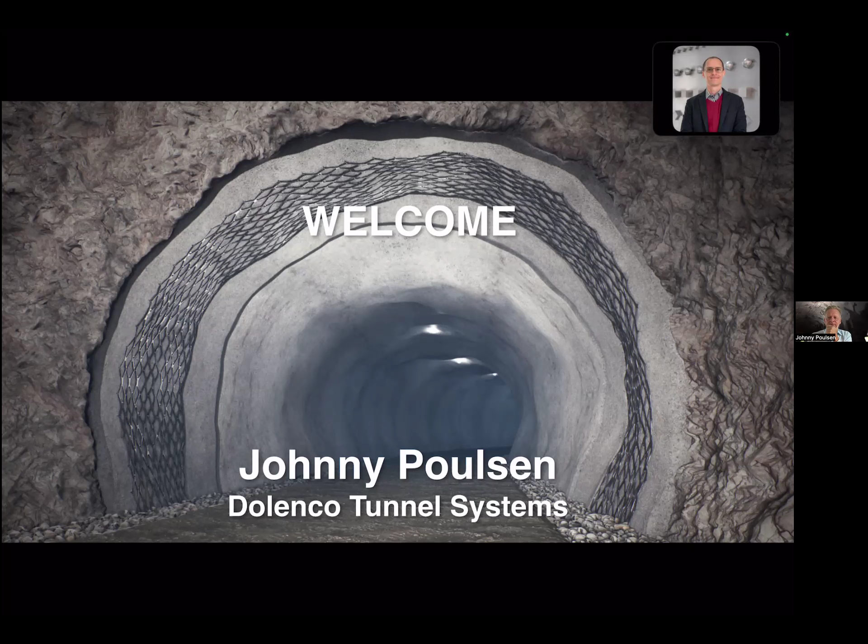When we start up and talk about tunneling, we have two things we typically think about: the soil and the water. When we do the excavations, we could talk about the soil dynamics. What happens when we dig out an entire tunnel from a mountain? The soil dynamics change, and they can change dramatically, as we can see in the picture here. And of course, our work is complicated because these changes are very variable. We don't always know. We try to make investigations, but still we get surprises during the phases we go through.

So now what we have are the pressures from this open excavation we have made. We have pressure from water and soil. And typically for the water, we see that pressure being released into the tunnel. This is how we see all the water running in, of course.

So we conclude that we do the construction the best we learn, and we do this to make it useful. In the beginning, to make it safe, but useful, so we can utilize it for whatever the aim of the tunnel is. After we have constructed the whole linings and so on, what we have decided for the individual project, we will get a new dynamic and a new balance in the structure. This is the basis for the soil dynamics - we see that it's settling and finding a new balance there.

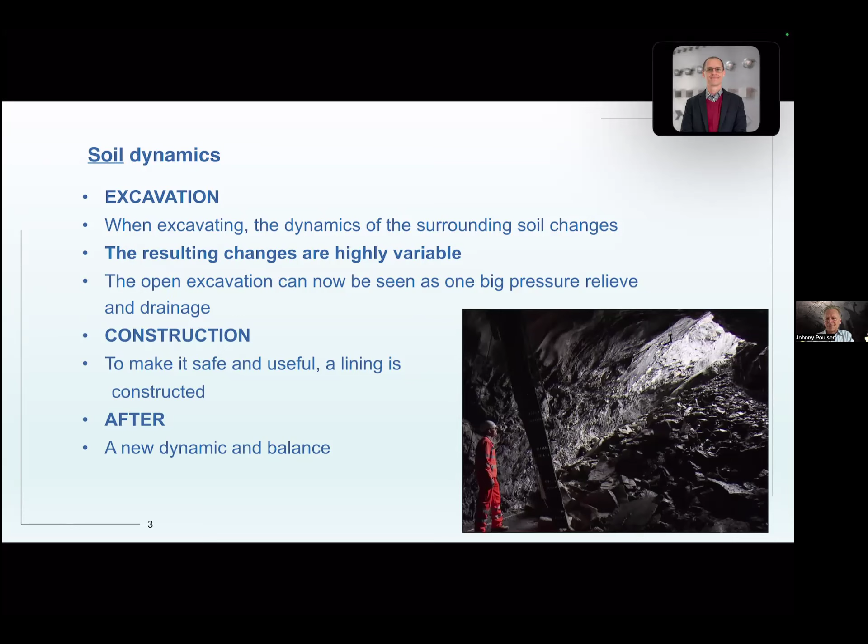As for the water, we have the same cycles where we excavate, the water starts flowing freely wherever it is possible. We can see this on the photo here. You all know about these situations. During construction, we have to do different things to accommodate these problems in different ways. The water affects the different steps of construction.

After we have done the entire construction, we have a new phase with other kinds of problems. Typically, what you see is that when you have the lining installed, you have a number of issues coming from the increasing pressure of water accumulating behind the new lining that has made the stabilization there. So we find a new balance, typically with more pressure on the structure after some time. This is also the cause of some of the problems that we see during the maintenance and utilizing of the tunnel over many years. We see a lot of remedial work and so on during time.

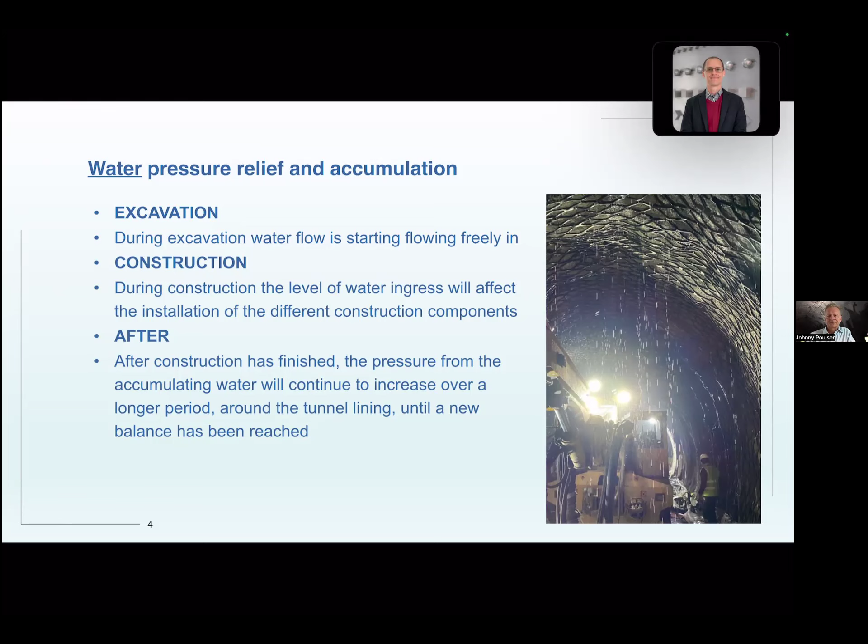So this is a little bit about the soil and the water conditions that we are facing. So you can see, why is this a problem? What is the specifics of this problem with the water pressure here?

Well, of course, when we start constructing, it's about the safety in the tunnel, that we can actually get in and start working. We typically see a lot of repair works that has to be done, and that delays the process of constructing. If we haven't had the proper installing over time of solutions that will be durable over a long time, we can also have structural integrity issues over time. We saw this in one of the first pictures where it simply collapses. That's the risk.

Furthermore, when we have cracks and so on, water coming in, we have a problem with the moisture in the air and the seeping water. It will damage the installations often, and we have to replace them, which is costly. We can have failures that are also critical in the installations. Further, we have the drippings on the roads, on the tracks, and on the installations.

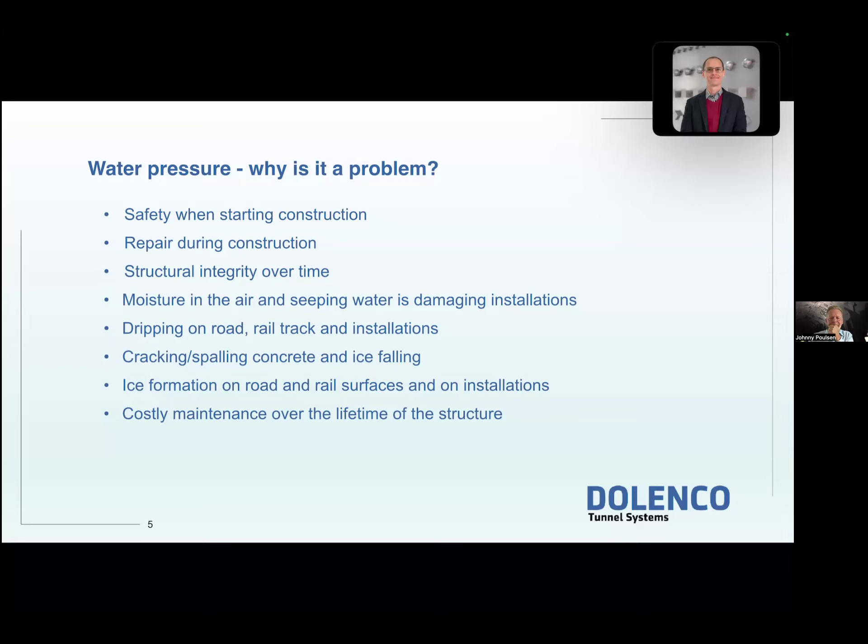The further structural issue is, of course, the cracking from the frost. If you have frost in the cracks and the spalling and so on, parts falling down, ice falling in different situations. We have from the water the ice formation on the surfaces in the tunnel, on the ground surface where you have the rail or the roads. Of course, all these can make it very costly to maintain the structure over the lifetime, the life cycle cost of the structure. So there's a number of issues with this water pressure.

So what do we do? What do we try to do? We try to do three things. We try to block it by grouting or waterproofing, or similar. We try to divert the water by line drains and other drains, and this is what we're going to talk about later. We try to accept it - we simply say that it drips a little bit, that's okay, we'll have to do something over time, and it's not critical. Then long term, we have to go and do some remedial work, injection, concrete repairs, replacing installations, and so on. So this is basically what we're doing.

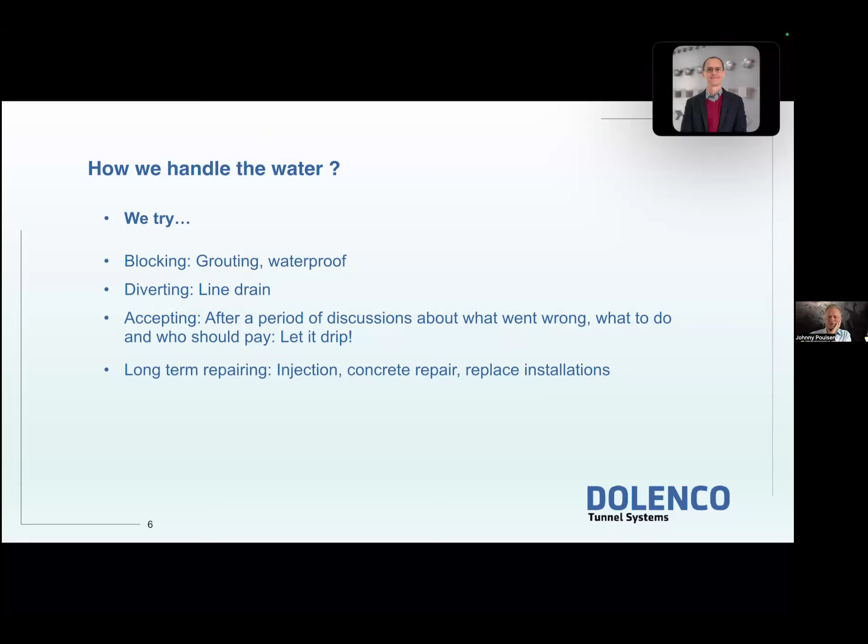So there's no golden solution to building tunnels, as we know. It's very, very complicated. So during the construction, we have excavated until we are finished and ready to use the structure.

We have some components, the shotcrete, the concrete, where we can do some things. We can make it a fast-setting product. We can design for less cracking. We can also cast heavy linings, and there's other issues as well that we can do. We can stabilize - we look at the stabilization, maybe with steel girders, with anchors, wire meshes, and so on. And we're trying to do some drainage, line drain, dimple sheets, geotextiles.

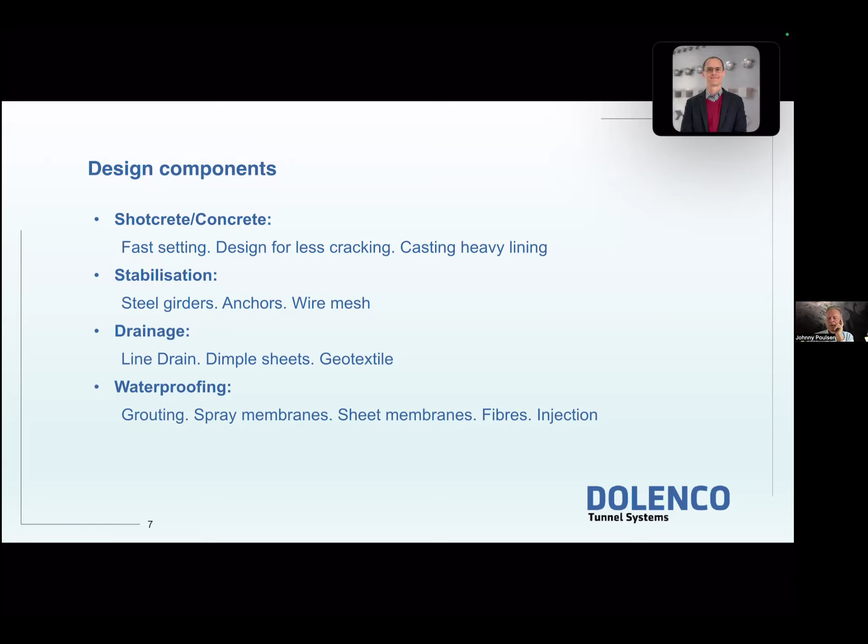And then finally, the waterproofing - the primary grouting. You can use membranes, spray membranes, sheet membranes. You can add fibers, or you can inject during construction. So we have a number of tools during construction.

We didn't really have any systematic approach to this. That's what we looked into with our more than 25 years of experience with waterproofing. We looked at what we can do and what we need to try and alleviate these problems. The basic thing we found was how do we manage the water pressure in a systematic way.

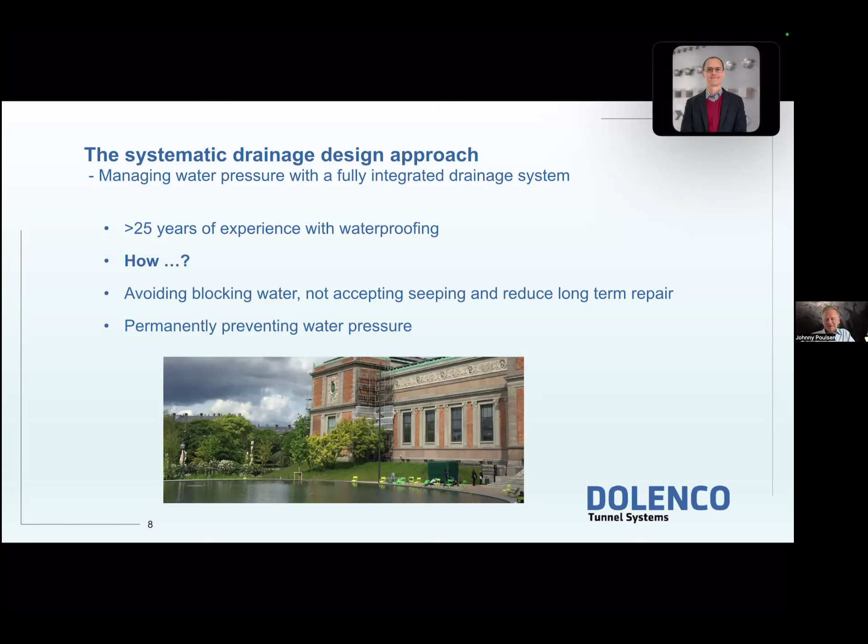This is why we developed the systematic drainage design approach. By doing this, we wanted to first avoid blocking the water, because it's highly problematic, especially over time. We don't accept the seeping, and we wanted to reduce the long-term repair. Our philosophy was that it should be a way of permanently preventing water pressure. So with this in mind, we developed the Dolenco drain system.

You just saw the video here in the beginning. To elaborate further, I'd like to go through this image a little bit. As you see, you have the base rock, and then you apply the safety layer of shotcrete. At this point, we add the Dolenco drain on the surface to receive the water as early as possible in the structure. This way it alleviates the pressure on the inner lining, and alleviates a lot of the problems and issues described in the previous slides.

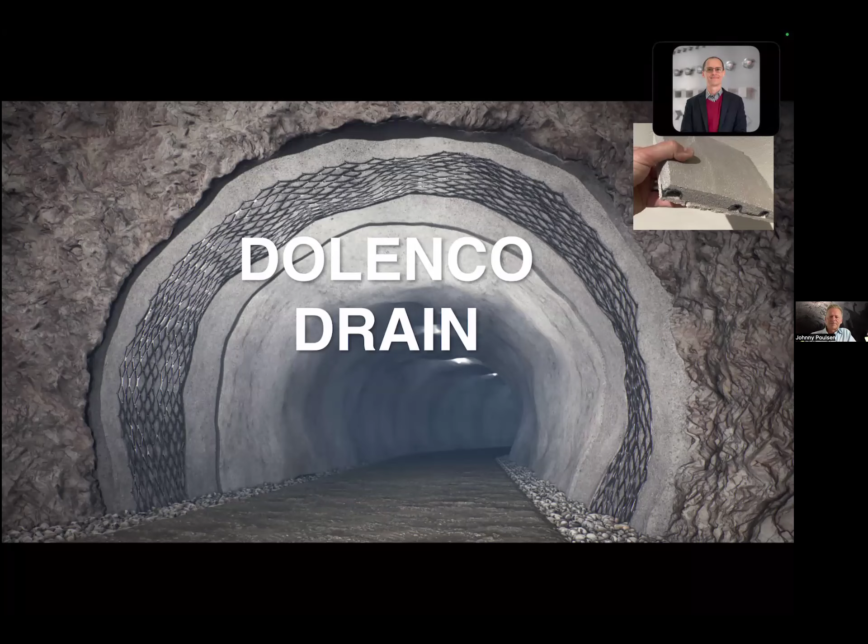So what is the Dolenco drain, the product? Well, first of all, it's half pipes in a mesh that is interconnected horizontally and vertically. What you see here on the right is the product, the way it looks. It is only 14 millimeters high, so it takes very little space to install in the structure. It is 1 square meter per module, and it weighs only 660 grams, so it's very easy to handle.

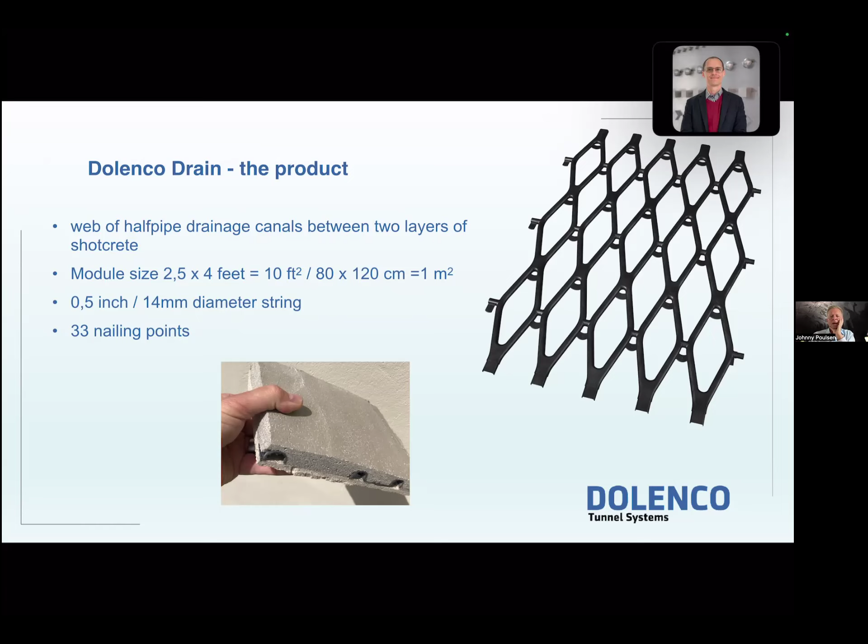As you can see on the picture on the bottom left, it illustrates very well the dimensions and the embedded strings in the concrete. And then there is, of course, a number of nailing points on the module.

As you can see here, this is how they are connected. We start with the modules from the top, and then we overlap them vertically. As you see in the top left picture, you overlap the ends so the water can be directed further down to the base of the tunnel. Besides that, on the bottom left, you can also see the horizontal connections, so the water can go from one string to the next. This is very important, that the water can go horizontally as well, so it can alleviate any kind of pressure. If there's quite a lot of water, it will disperse sideways as well, so there's no pressure built up in the strings.

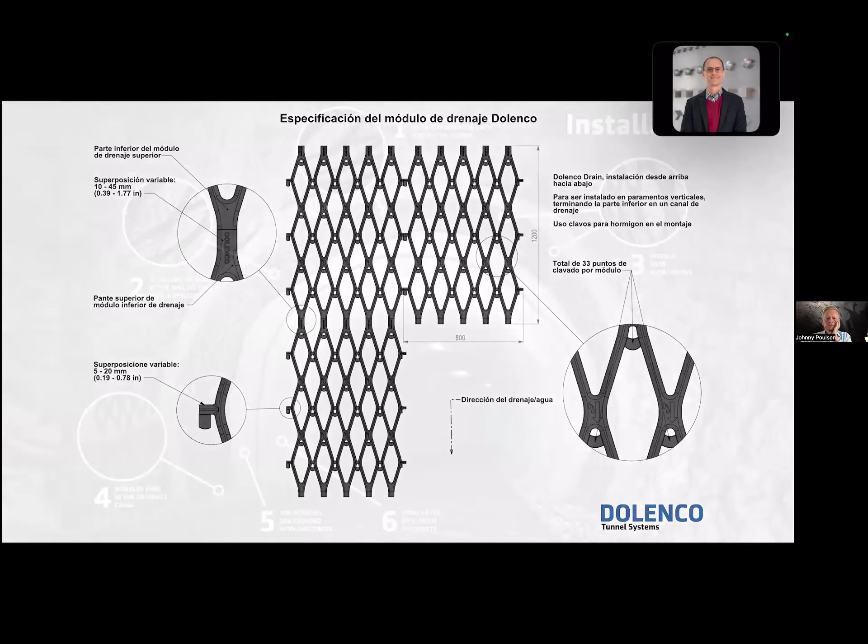Now, the first step is that we start from the top and mount the first modules, overlapping them down on one side in one line, and then down on the other side, overlapping and going to the base, where there is a detail for alleviating the water, so it will be led away from the structure.

And then, of course, the inner layers, which can be shotcrete with fibers, can be crystalline waterproofing, can be a spray membrane, can be combined with a sheet membrane, or can be done without any other features if you have a thicker layer of shotcrete, depending on the volume and the pressure of the water coming out of the structure.

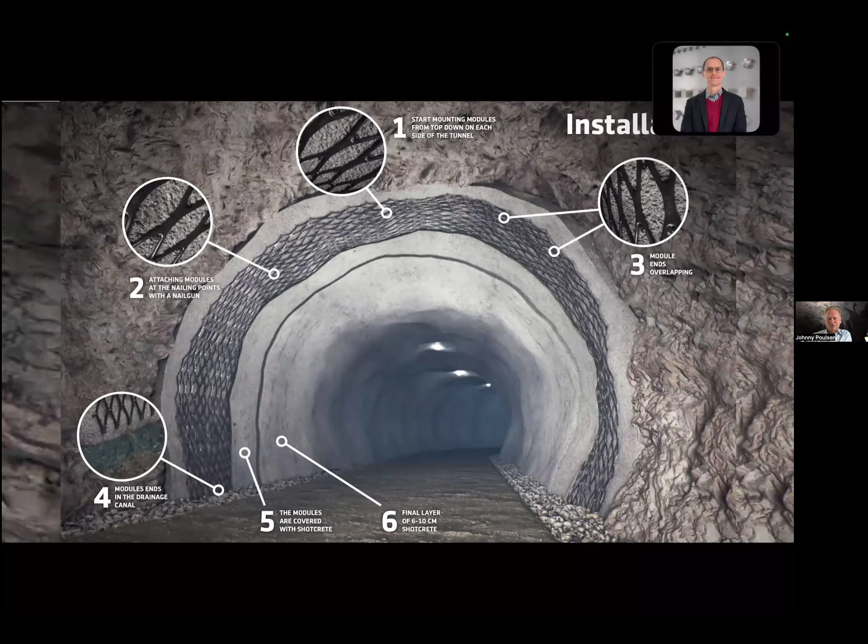So at the base, we see the water coming out. If for some reason one of the strings would block, as mentioned before, the water will disperse sideways to the next strings and alleviate the pressure.

However, if the client needs to investigate whether there are a lot of blockages in the strings, we have also included in our patents a scanning method where you can identify blockages by seeing if there is water in the string or if it's empty. When we find a blockage, we can go in and either route it out mechanically or by water pressure, so we can clean the strings if necessary. It's not something we see very often as an issue, because of the nature of the mesh, with so many strings interconnected.

And then we can check at the bottom if the water is coming out of the strings, to see if it's fully in function.

So a little bit about the capacities of Dolenco Drain. When it is installed, it can take 8 cubic meters of water per linear meter of wall per hour. The volume is, of course, quite significant, so we really don't see a need for more than that. And if you have this kind of water, you probably cannot get the shotcrete to stick to the surface anyway, so you'd have to do some grouting or lead it away in a hose or similar different ways of doing this.

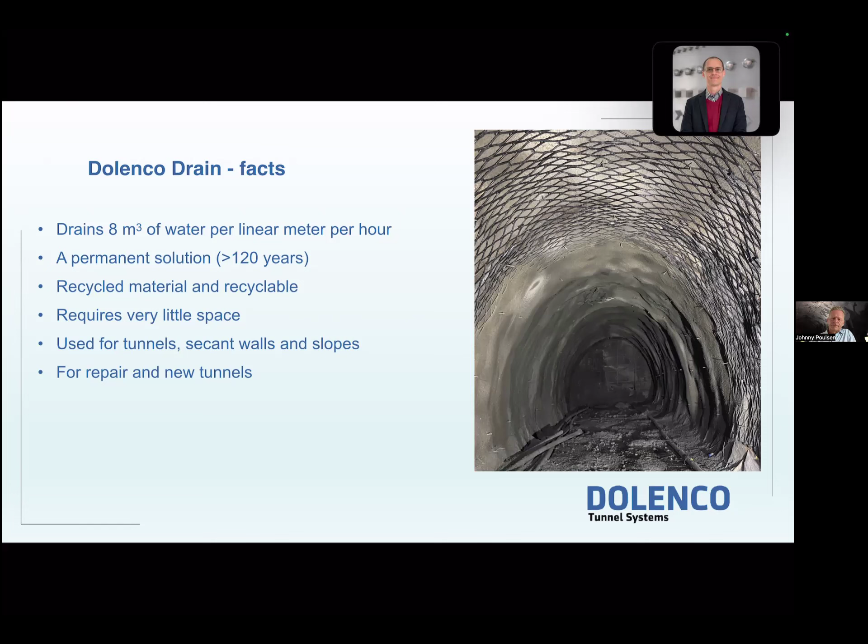And of course, the drain can be used both for repair and in new tunnels. Often when you talk about repairing, there's limited possibilities to what to do in terms of installing new materials and so on. Here's again an advantage of putting the drain in, so you permanently prevent the pressure on the inner lining.

One of the other advantages of permanently preventing the water pressure is that if you use a spray membrane during construction, you will be able to keep the water pressure away from the spray membrane as it is hardening. It needs time to harden before the water comes, and this is very often an issue since the water is seeping through or making the concrete moist. It can also be because you have damages on the membrane, maybe you need to do some repair because water comes through, and all this you can save time and money on by having the drain behind that.

So of course, minimizing injection is not only during construction, it's also during the lifetime of the structure, because you permanently have relieved the pressure from the inner lining. Closing down the tunnel is not a cheap and short time solution. It takes time and it's costly. So if we can just save a little bit of this, then it's a very, very important saving to do.

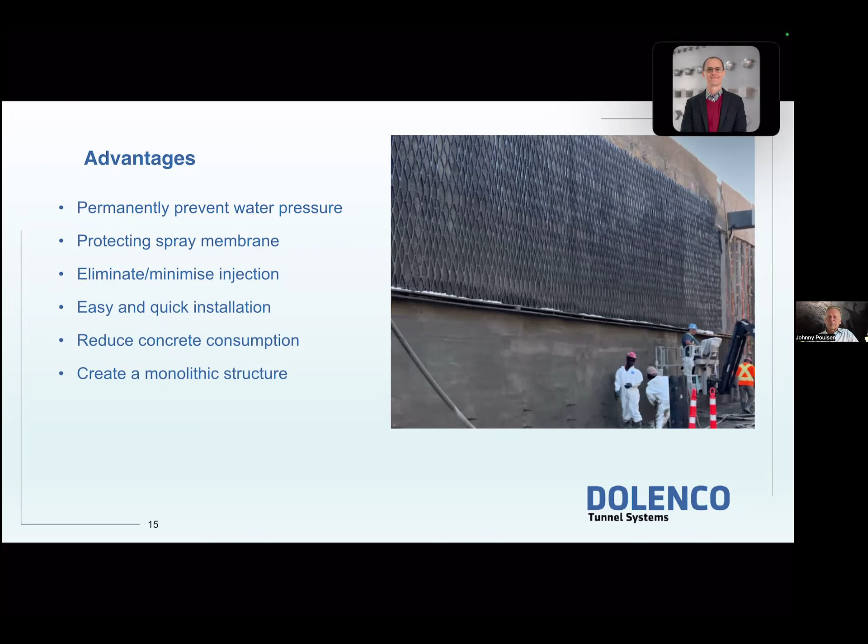And the picture here is from a ramp where it was secant piles leveled out and the Dolenco drain mounted onto that, covered with shotcrete, a spray membrane, and another shotcrete layer.

So talking a little more about the advantages, we talked about the CO2 footprint. We have done some calculations that show there's significant savings, and we tried to do this in both hard rock situations and soft rock situations.

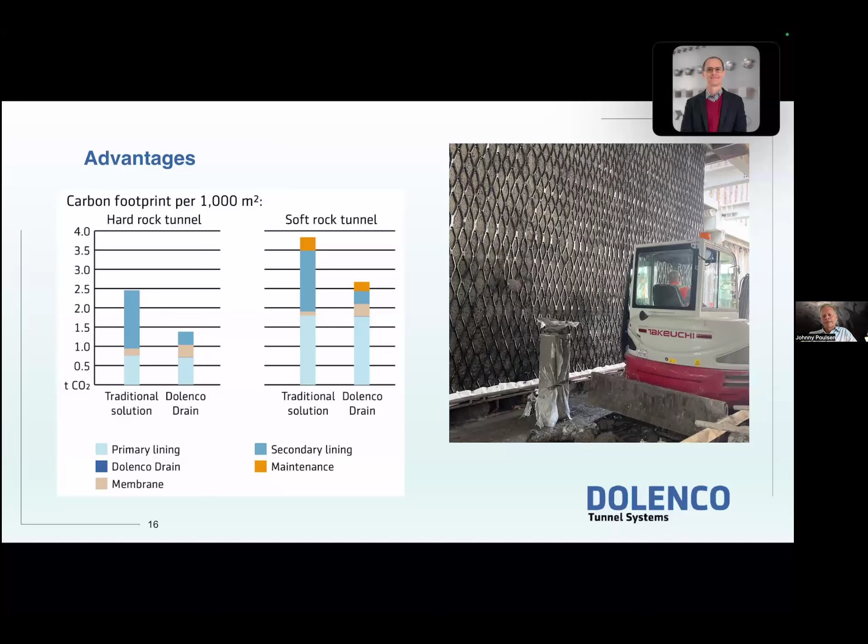As is on the right here, this is a project from Spain where they actually built a scaffold around the rail, so the train is actually running during work, and of course this made it possible to work faster.

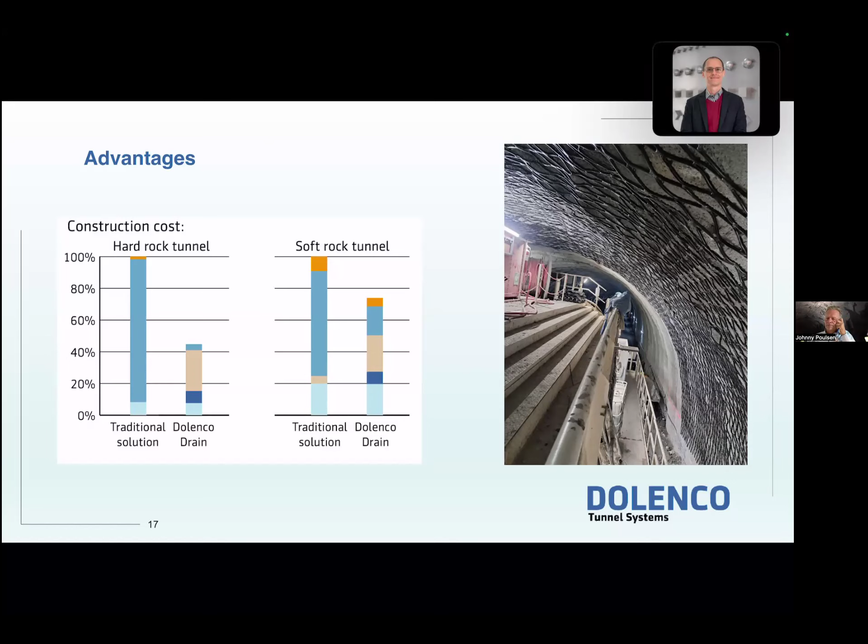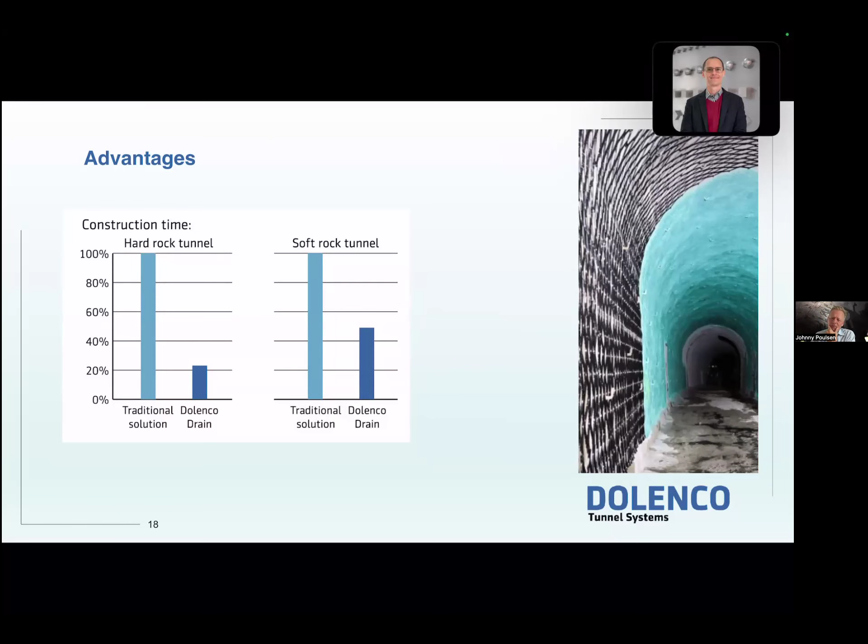So before going further, I would like to show you a small video about secant pile applications, as you can see in the picture here. Just give me a second.

Here we see the leveling out between the piles and repairing the reinforcement, then mounting of the Dolenco Drain.

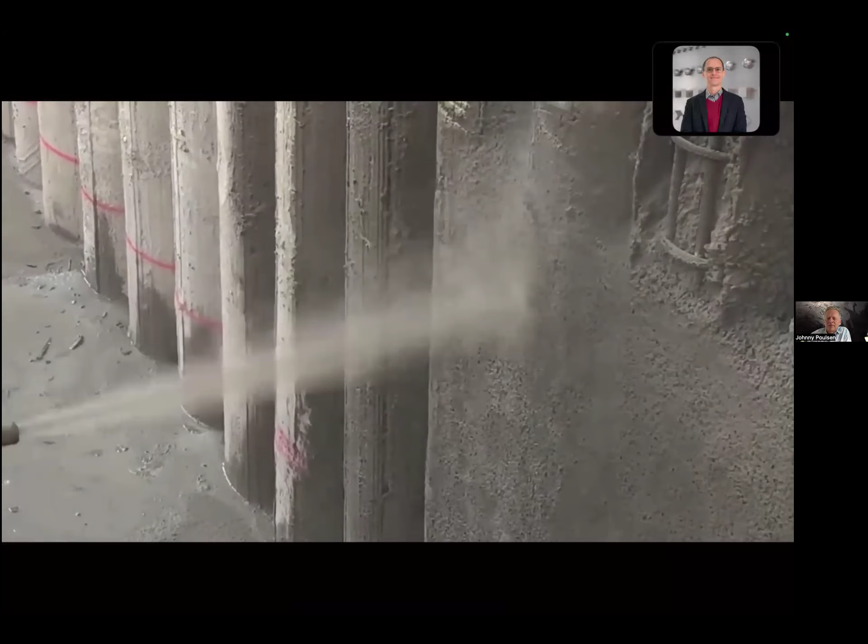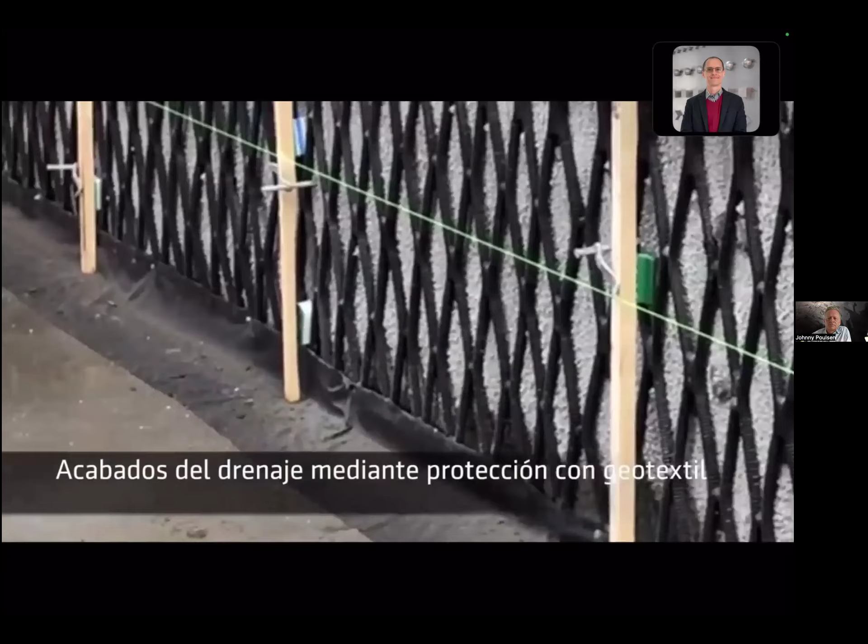Two persons and a nail gun, and two persons can mount between 12 and 20 square meters per hour. In this case, they cover with shotcrete, and that's it, 50 to 80 millimeters.

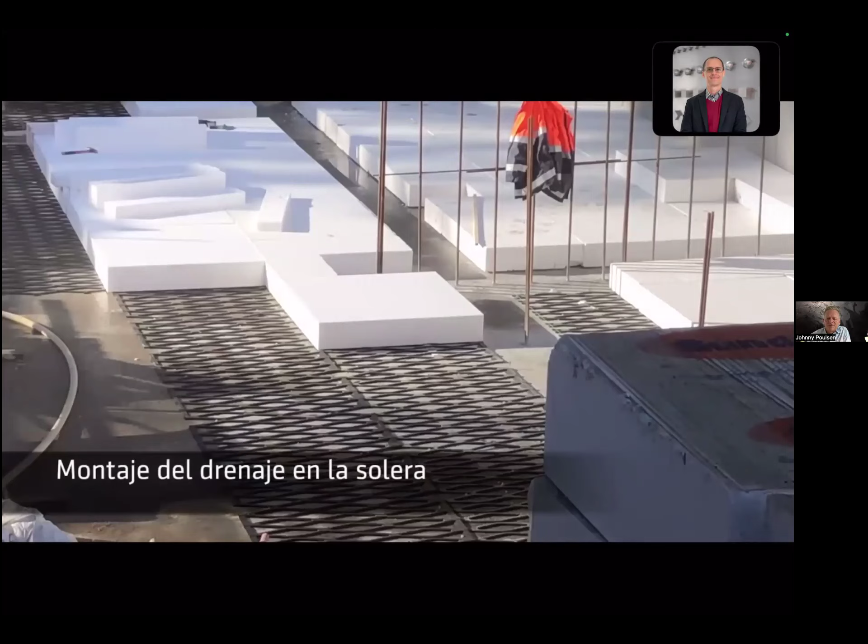And also in this structure, they also use the floor version we have, which is for water coming up from underneath. This can be used for inverts as well. And this is, of course, load bearing.

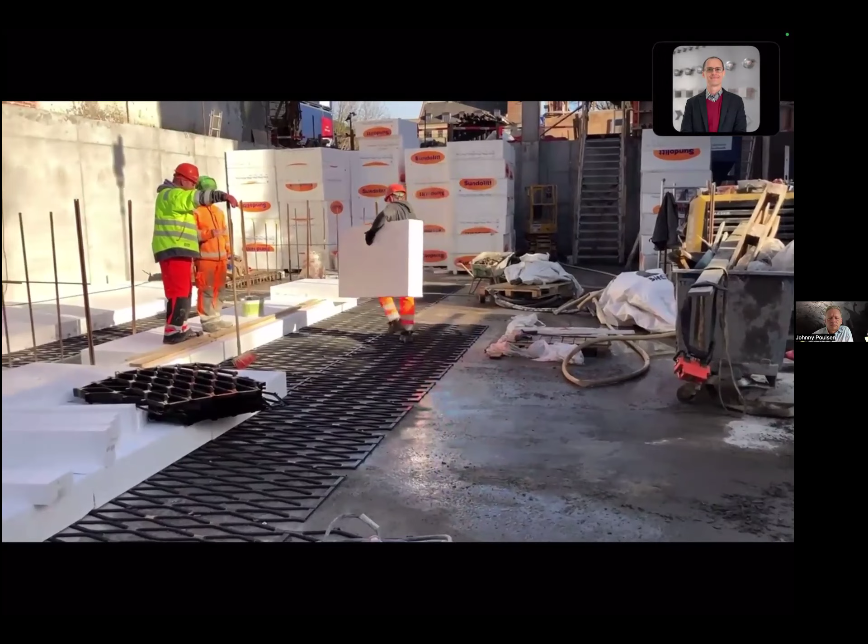Good, so that was a little bit about the secant piles. Besides this, we have a number of other application areas. It could be, for example, on the rock before shotcreting in an open gripper TBM, and it could be on slopes between two layers of shotcrete.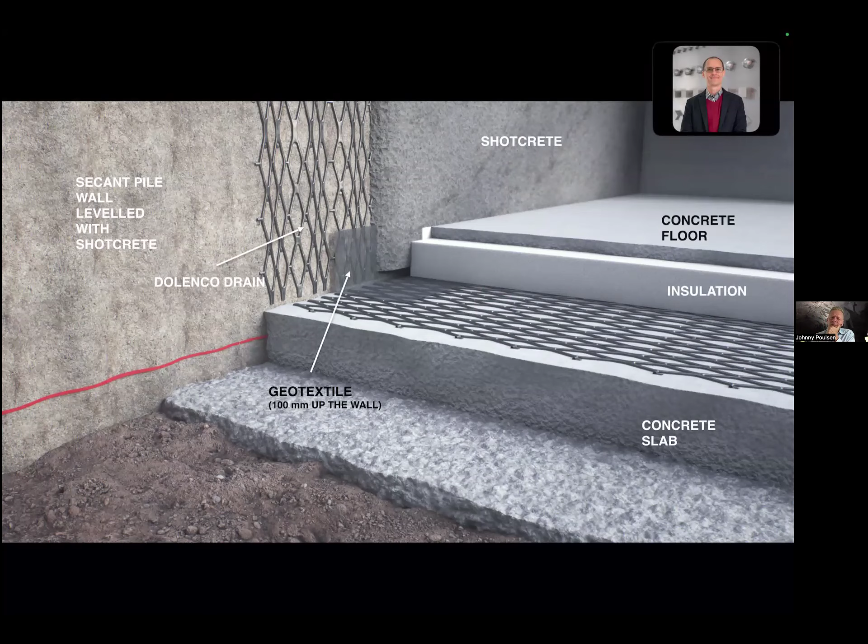I'm not going to go too much into this since we're talking about tunnels. So here, directly onto rock.

Usually we mount the Dolenco drain onto a minimum of 30 millimeters of shotcrete, and this is because the nails we use are 30 millimeters. But we have had requests, and there have been some projects where they put the Dolenco drain directly onto the rock. This was a request because they could not get the shotcrete to stick to the surface.

So they basically just held the Dolenco drain onto the surface with the unevenness that there is on the rock surface, put a wire mesh over, as you see in the picture here on the right, fixed it with anchors, and then shotcreted the whole thing.

And actually what happened was that they could get the shotcrete to stick to the surface, and they stopped 80% of the water flow. So in that way, it was a very pragmatic solution and successful in their eyes, because it made it possible to do something that you otherwise would not have been able to do.

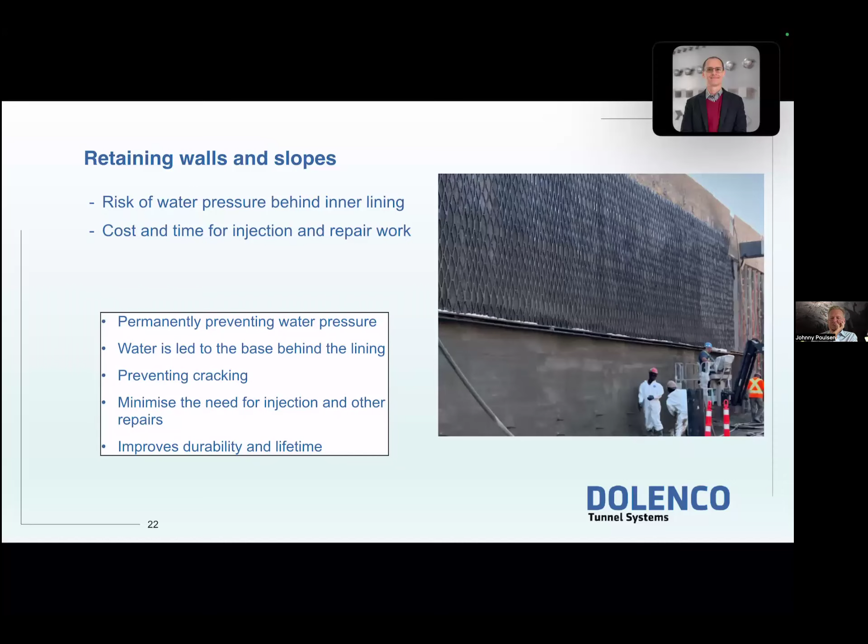So of course, when you have installed it, behind the inner lining you'll have the water again being led to the base behind the lining, and you'll have the prevention of water coming in through cracking, and so on. So overall, you get a more robust solution with better durability and longer lifetime.

Talking about the projects with the spray membrane, this is an example of a project from Canada where there were actually two tunnels with a wall in the middle. The wall was severely damaged and degraded, so they chose to take it out and put steel girders in to strengthen the whole tunnel.

Then they used shotcrete layers and a spray membrane. During construction, when they had put on the spray membrane, water came very quickly and gave them problems, so they couldn't continue, and they basically changed the design at this point.

The designer changed the design to include the Dolenco drain. After putting this in, they saw the issues resolved. Putting the Dolenco drain in behind the shotcrete solved the issue. So after putting the smoothing layer on, before the spray membrane, they had a dry surface and didn't have to do any remedial work, and could put on the next shotcrete layer and finish the structure.

At this point, I'd like to show you another little video where you can see the unevenness of the surfaces where it's possible to apply Dolenco drain. Just give me a second here. Where is it? Video this. Sorry, over here. Great.

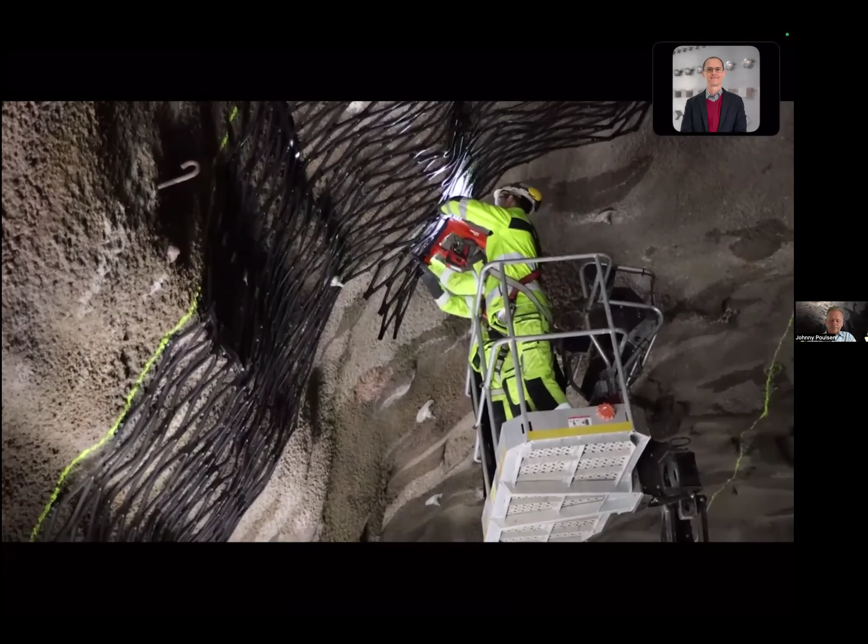As you can see, the nail gun is battery-driven, a very easy to hold handheld nail gun. And notice the unevenness of the surface here.

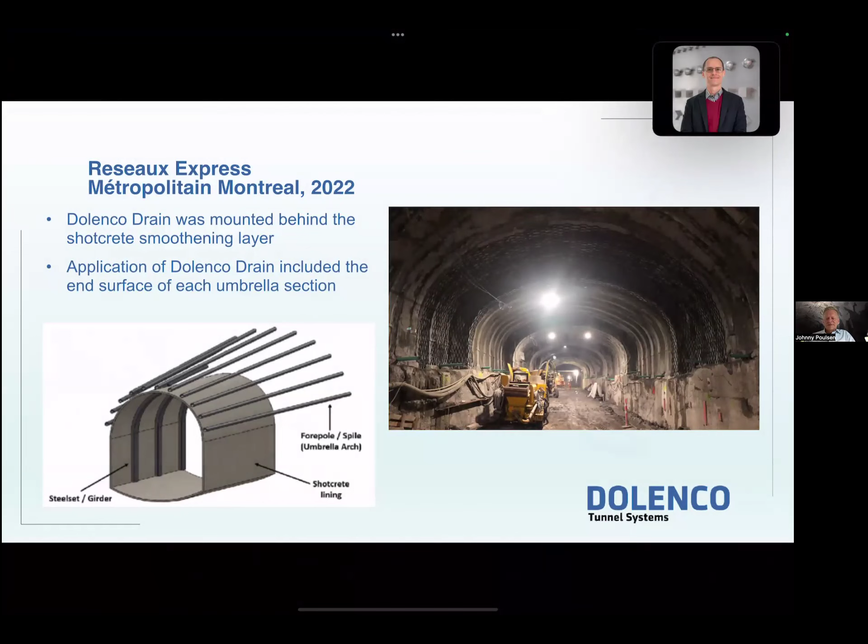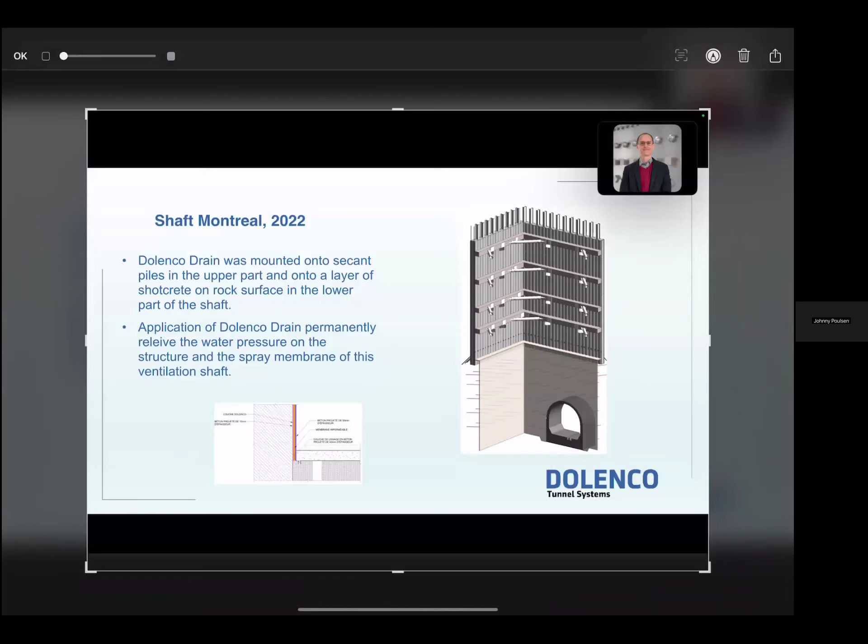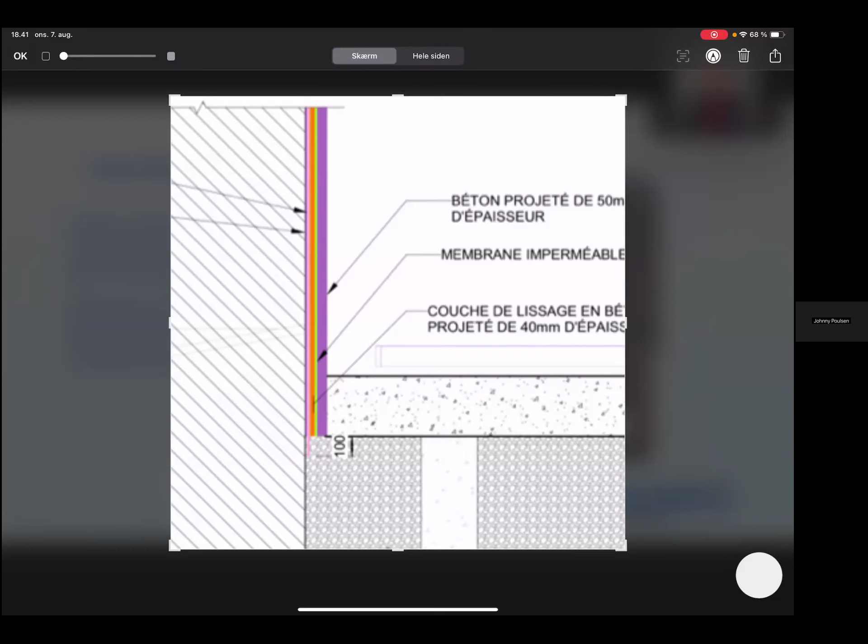What I would like to illustrate here is that the pink line next to the wall surface is extended 100 millimeters past the slab, below the slab, and that pink line is the Dolenco drain. This was a very simple and easy way to alleviate the water from the Dolenco drain modules into a stone layer beneath the slab. There are different ways of doing this detail, and I'll get back to this in the next few slides.

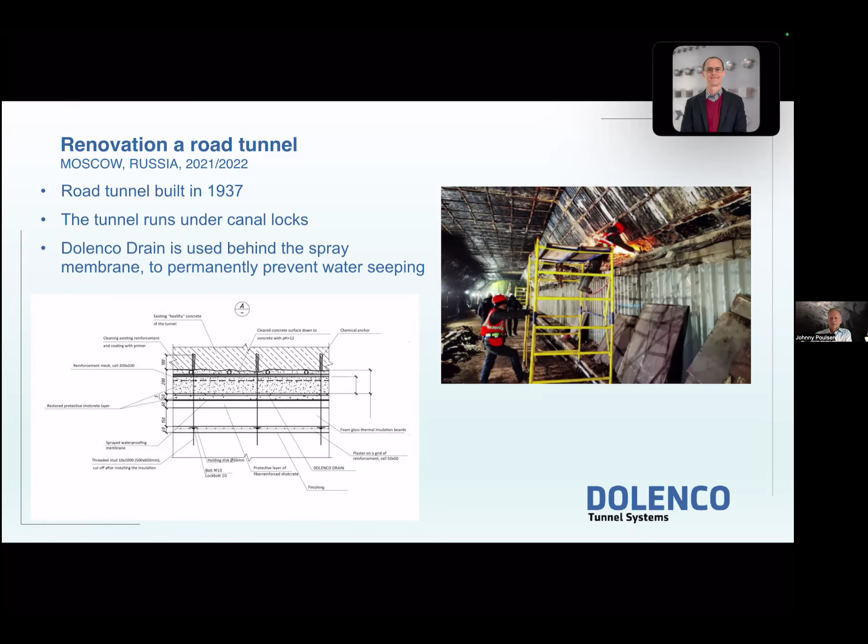But it was absolutely dry after this. Here's another example, from Philadelphia, USA. It illustrates that you can also, as you can see in the picture to the right, just remove 10 centimeters of concrete, put the Dolenco drain in, and cover with 10 centimeters of concrete again. Then you basically stop the water from coming in through the inner lining, leading the water to the base behind it.

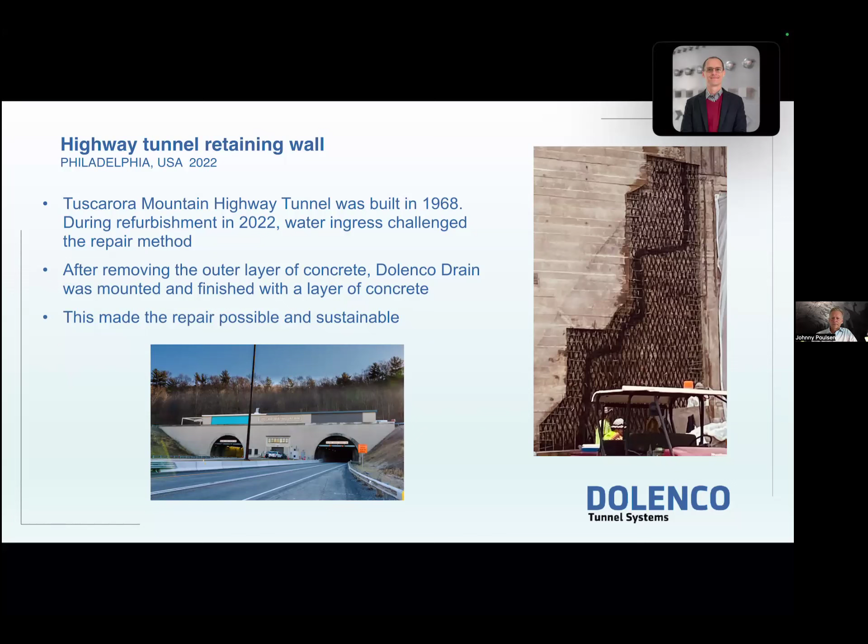Here's another example of spray membrane. In the Mumbai Metro, we didn't do the 33 kilometers, but the part we did with the Dolenco drain was done because they changed from a sheet membrane to a spray membrane. Since there is no systematic drainage available behind a spray membrane, they found that Dolenco drain can do that. You can see it's also combined with line drains, which makes sense sometimes if you have a lot of water coming in. Like I mentioned in the beginning, sometimes you have remedial work, and that could be one of them.

This is something we can also help with when you sit as an engineer with a project and you're not sure exactly how to use the Dolenco drain, or what is the best way to handle remedial work and so on. We can give you the input of our experience with waterproofing and also how to optimally use the Dolenco drain in the structures.

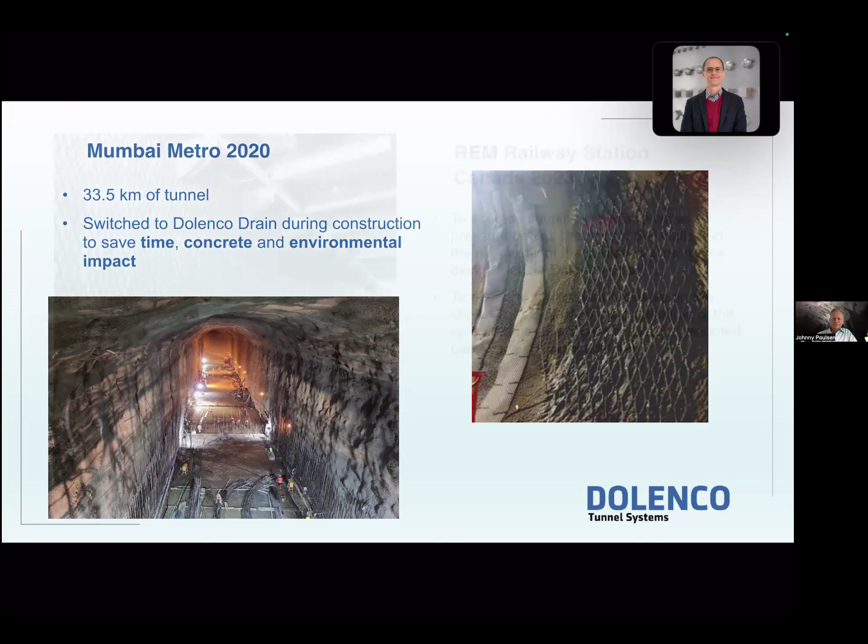Here we have a project which is a railway station, an underground station, also with secant piles, shotcrete, and Dolenco drain.

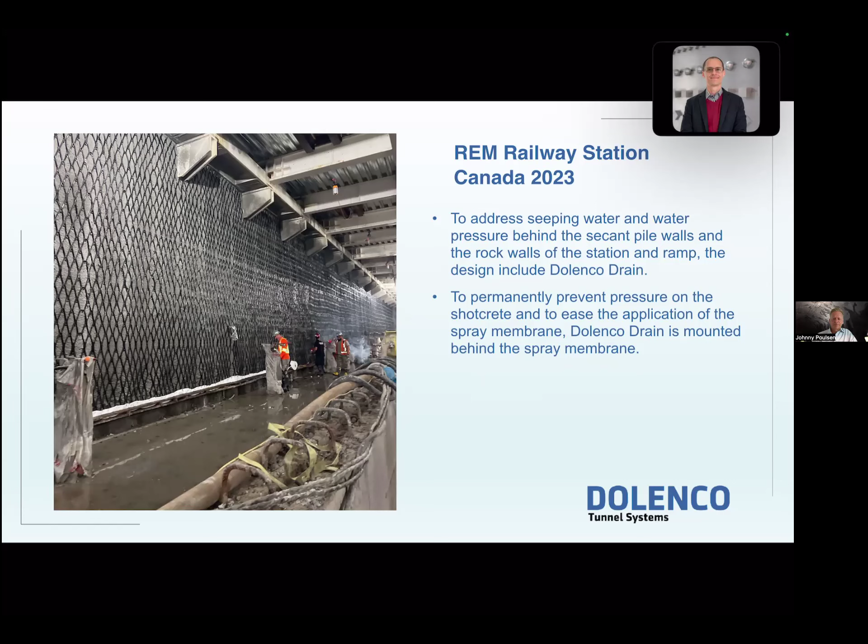Finally, before showing you a few design drawings, this is a project from Switzerland. This was a refurbishment, a repair. The tunnel that collapsed, you saw the picture in the beginning, collapsed, and they rebuilt part of it and put the Dolenco drain in and covered with shotcrete, put a drain at the bottom of the wall, and then basically covered with shotcrete, and that's it, no more. It has worked satisfactorily for the client.

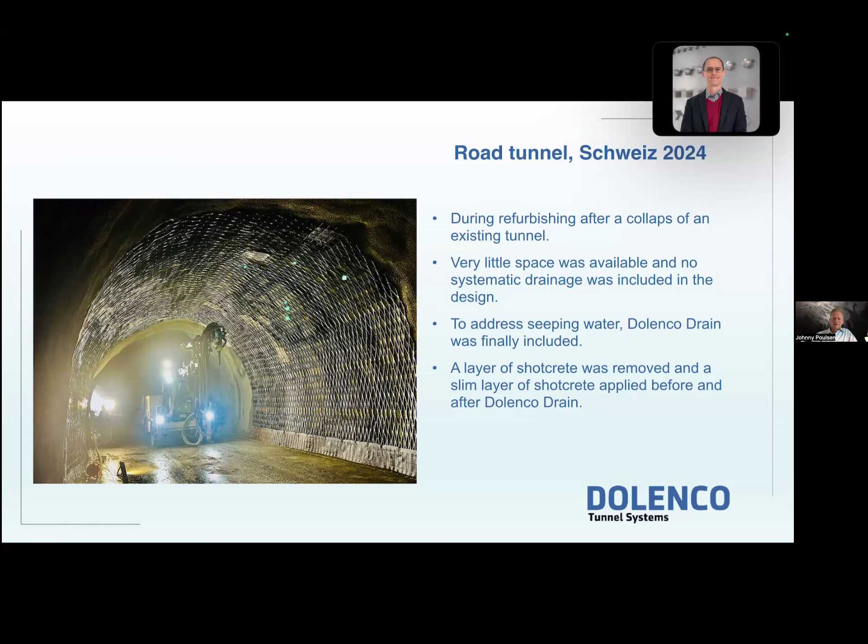So finally, I have three design details for principles of some of the designs, and basically it describes what I have been talking about here. But the detail I'd like to show you is the one in the middle, which is the bottom of the wall where you alleviate the water somehow. This is an example where you basically lead the water down onto the top of the slab.

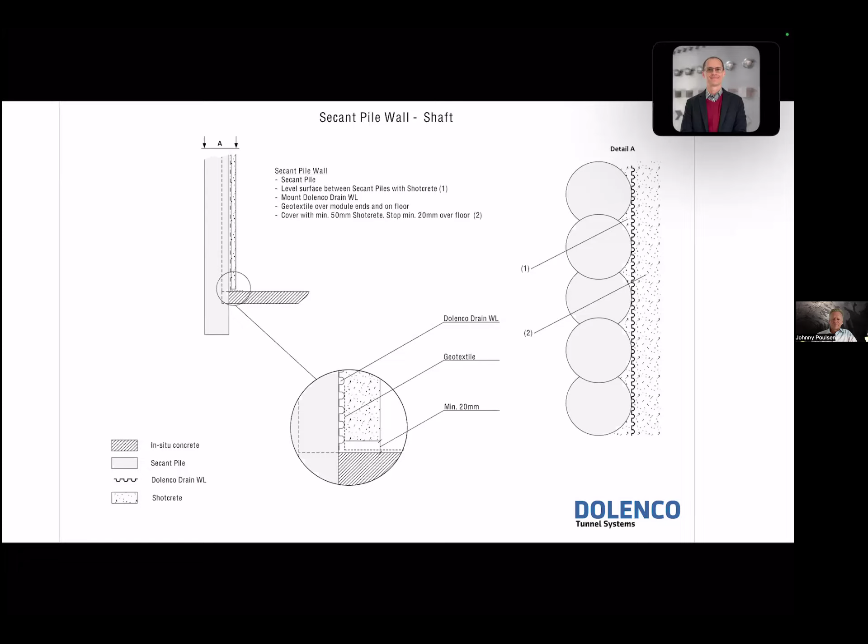Let me just zoom in a little bit. Here we see the base of the wall, Dolenco drain mounted directly onto that, and then a geotextile, a strip of geotextile over the end of the modules and out onto the floor. The reason we put this there is so that the shotcrete will not block the end of the modules. Then we recommend stopping the shotcrete at 20 millimeters above the floor, so the water can freely flow out onto the base and over to the drain.

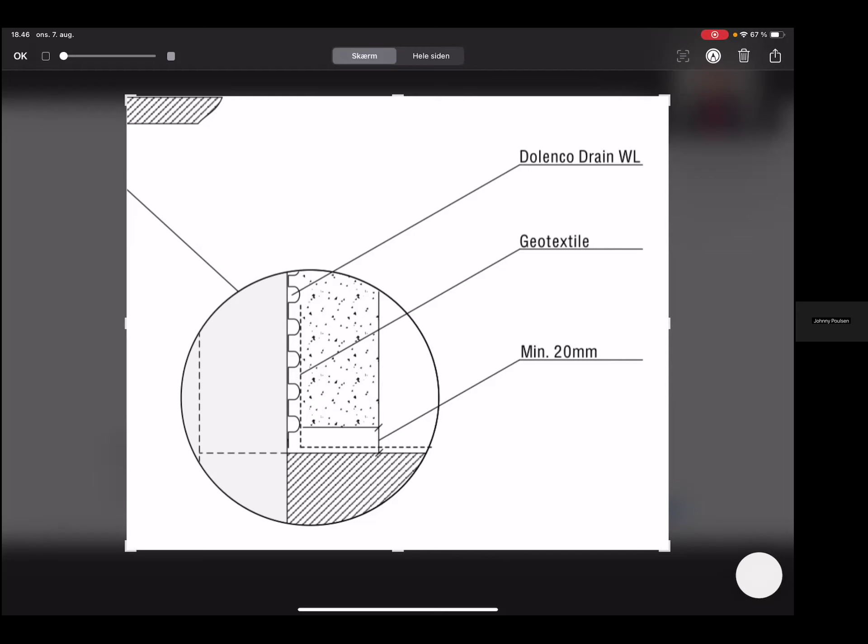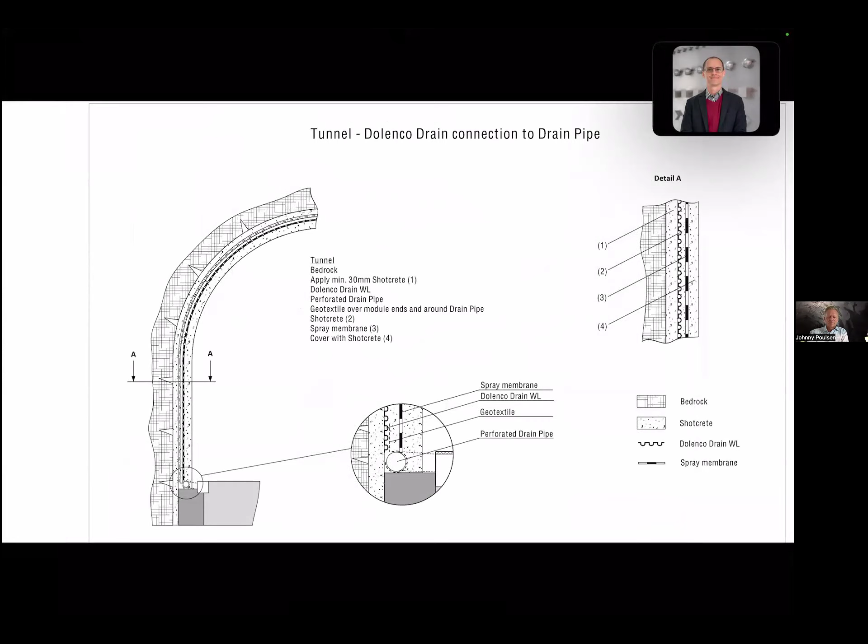The next detail here is about the tunnel base, another way of alleviating the water at the bottom. Here we see the rock surface, the initial first shotcrete layer onto the rock, and then the Dolenco drain installed onto that. After that, you install the perforated pipe and put a geotextile strip over the end of the module and around the pipe, followed by covering with shotcrete and a spray membrane or sheet membrane, and finally finalize with shotcrete, or it could be cast concrete also.

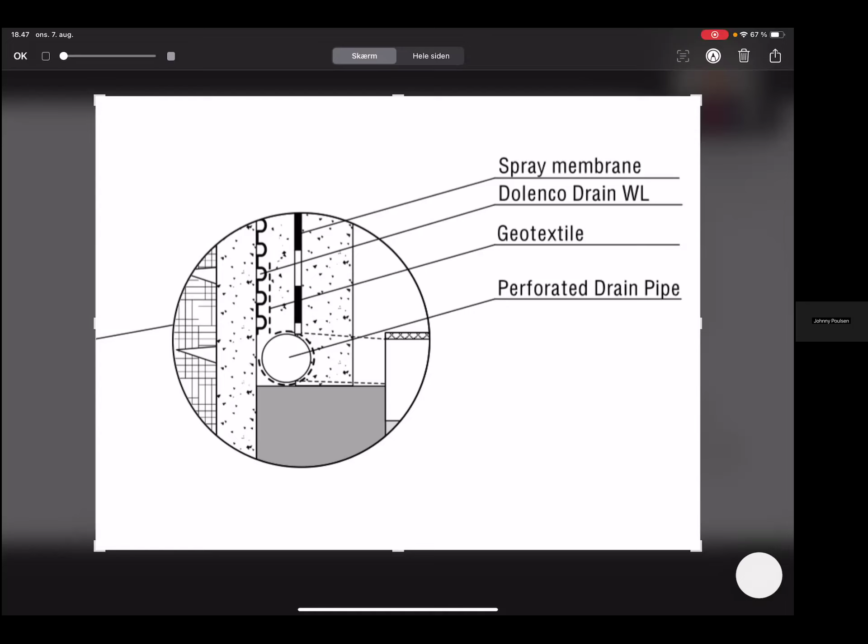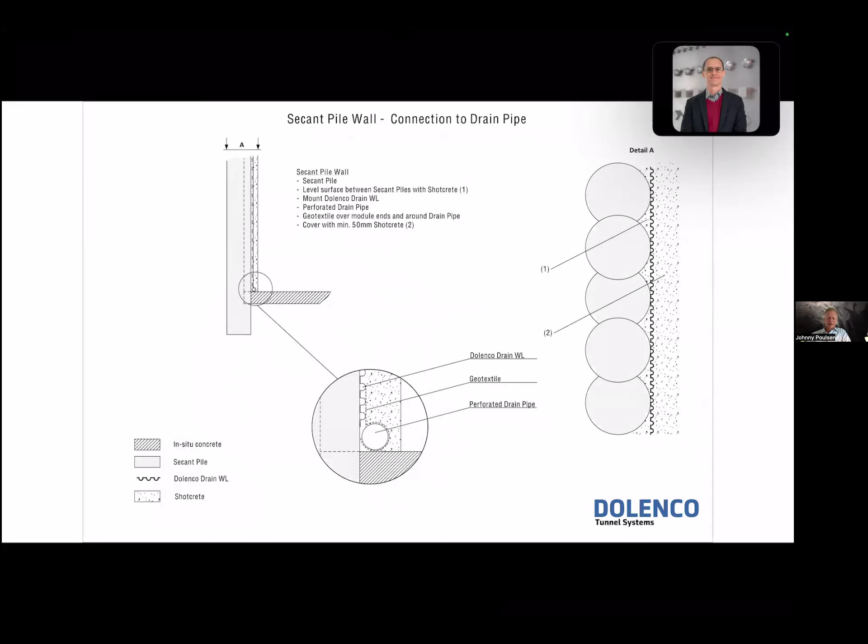Finally, the simple version here is alleviating the water from the Dolenco drain modules into a perforated pipe only by covering with geotextile and shotcrete. And of course, if you want to do other solutions, again it depends on the situation, the individual project you may have, and the individual presentation or design.